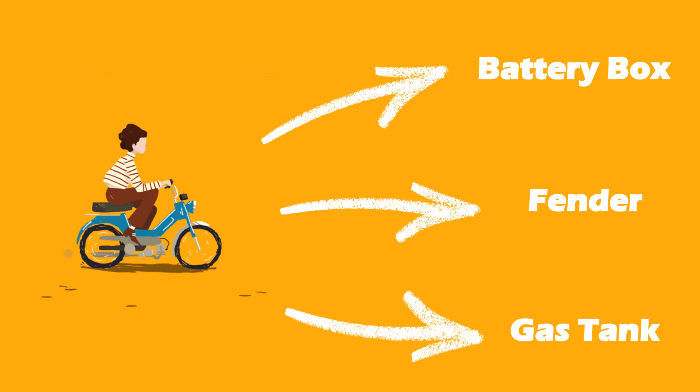The first part of the motorcycle that we are going to talk about is the fender. The principal purpose of the fender is to prevent sand, mud, rocks, liquids, and other road spray from being thrown into the wheel. This part of the motorcycle is made from aluminum because it needs to be light, strong, flexible, malleable, a good conductor of heat, and have high corrosion resistance. All of these qualities are required for the elaboration of the part.

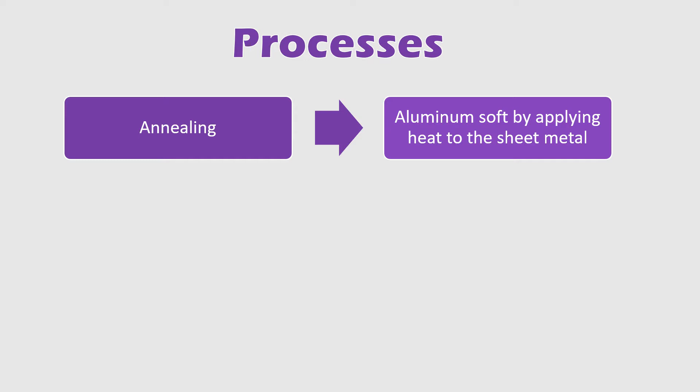In order to make this part, it's necessary to use the following processes: annealing. This process makes the aluminum soft by applying heat to the sheet metal, so it's easier to manipulate. Shrinking process. This is to give the aluminum the shape that is needed. First, it's necessary to shrink the outside edge to create the curve. You can also achieve the same results using a stump or a leather bag.

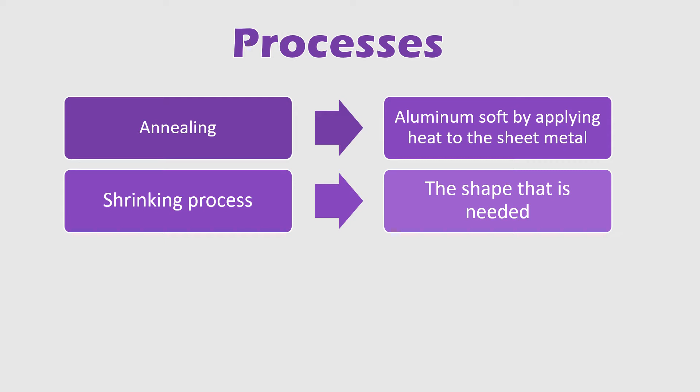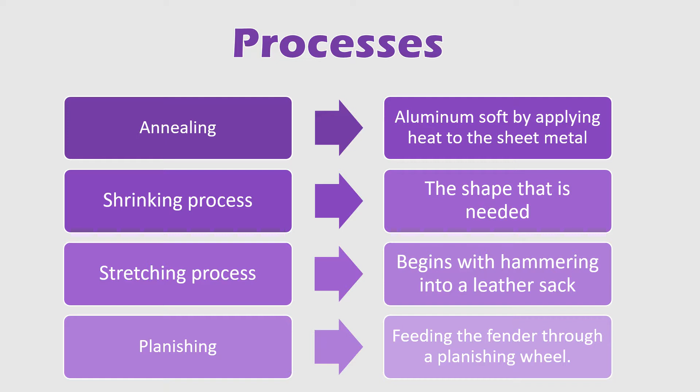Stretching process. The stretching process begins with hammering into a leather sack using a blocking hammer. In order to create a nice arc, it is necessary to hammer in the center of the piece. The metal stretches on the inside while shrinking on the outside. Planishing. This is to take out the highs and lows left from the shrinking and stretching processes by feeding the fender through a planishing wheel.

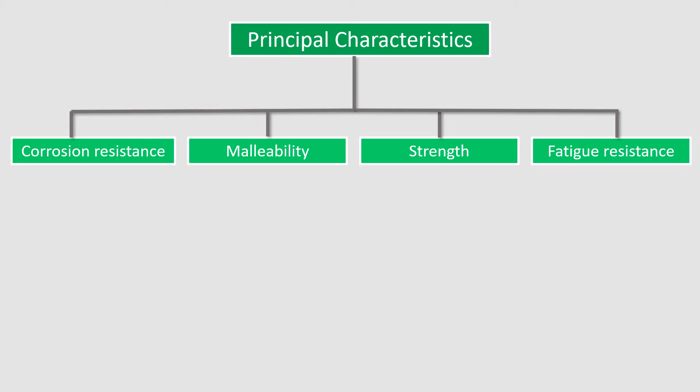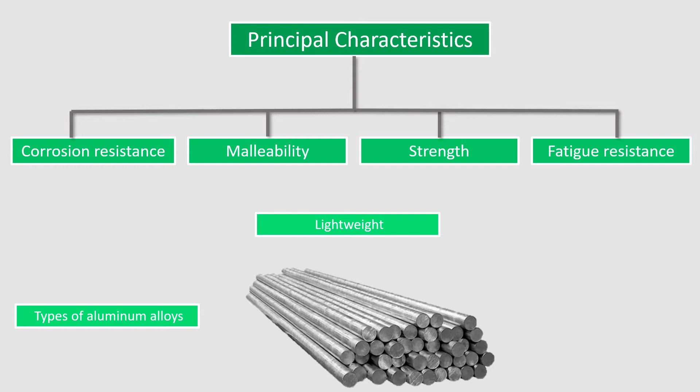When purchasing the aluminum, we need to take into consideration some principal characteristics like corrosion resistance, malleability, strength, and fatigue resistance. It is well known that aluminum is a lightweight material, but there are different types of aluminum alloys that are categorized depending on the alloy, and each one has different qualities for different applications. In the next two tables, you can see different types of aluminum alloys and their respective characteristics and applications.

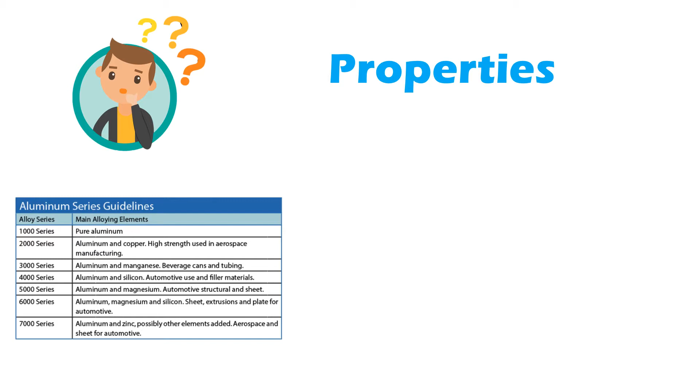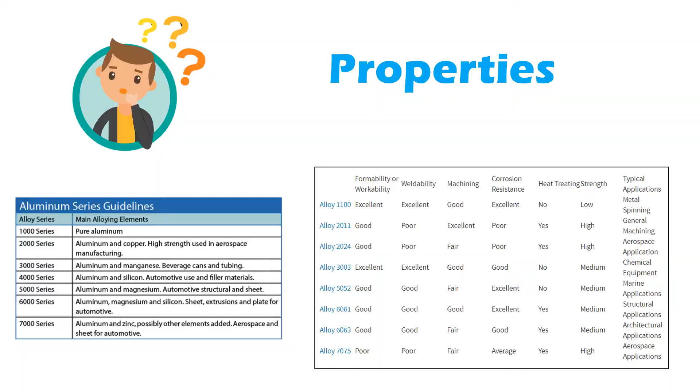For the elaboration of the fender, the best two options are the alloy 2024 or the alloy 6061. The cost of the alloy 2024 ranges from $3.88 to $4.95 per kilogram. For the alloy 6061, the cost ranges from $3.19 to $4.15 per kilogram. Each alloy reacts differently to certain welding processes. The most common ones used in the automotive industry for aluminum are resistance spot welding and arc welding. In the next table, you can see some benefits of each one and some drawbacks.

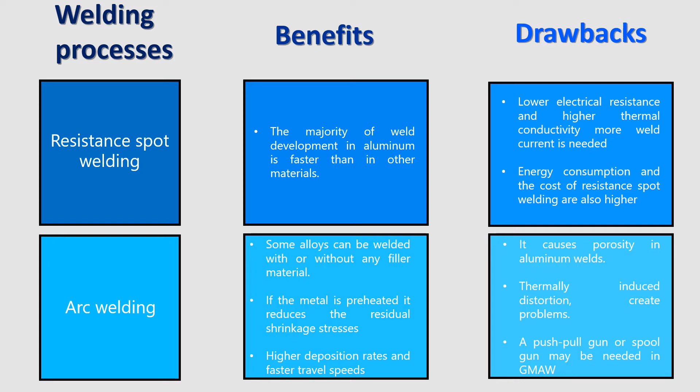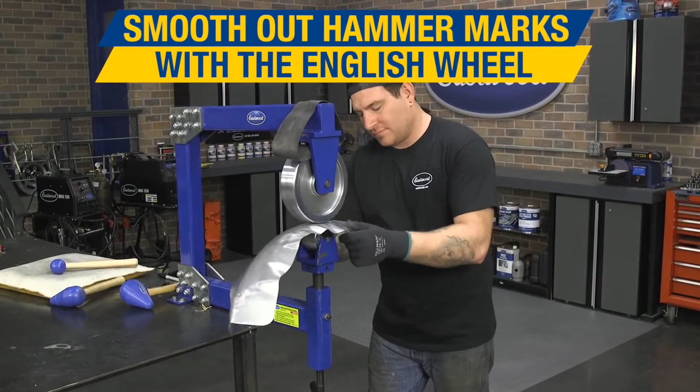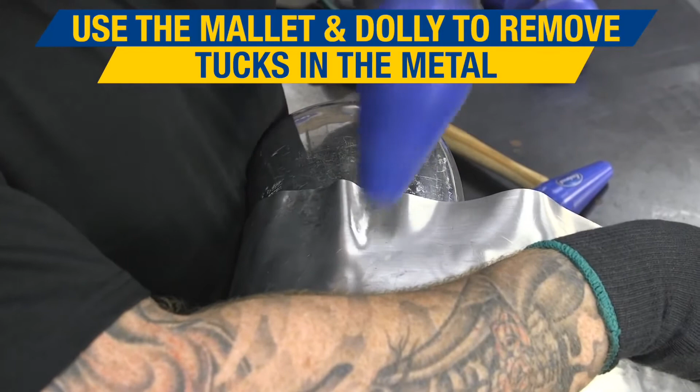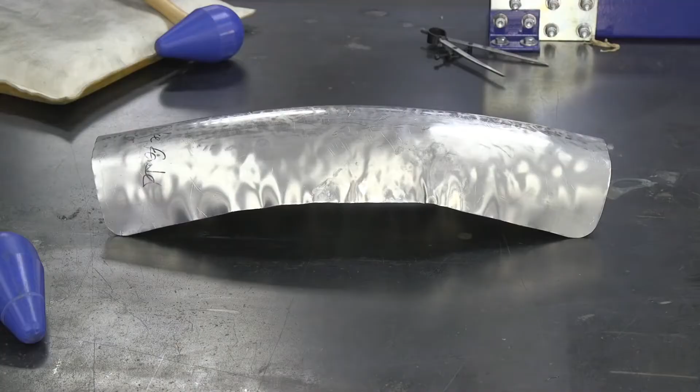It is possible to apply some heat treatment processes to the alloy 2024 and alloy 6061 to achieve some mechanical properties. In the case of the alloy 2024, the best option is to use T6 heat treatment, a two-phase process that can increase the strength of the alloy by as much as 30%. First, it is necessary to heat the metal at 494 degrees Celsius and quench the metal in water, followed by reducing the heat to 191 degrees Celsius for 10 hours.

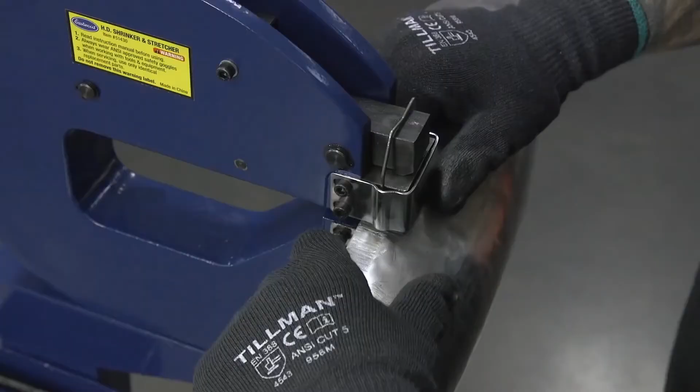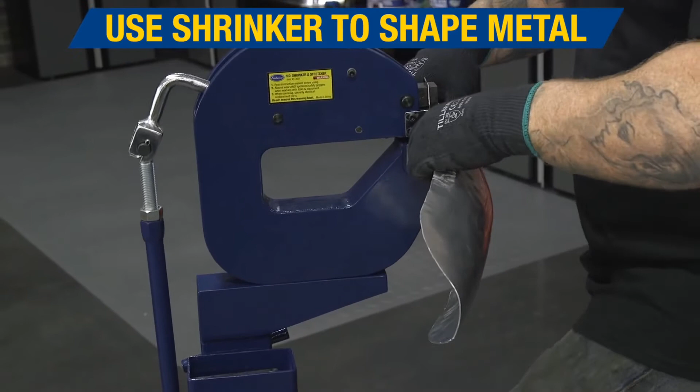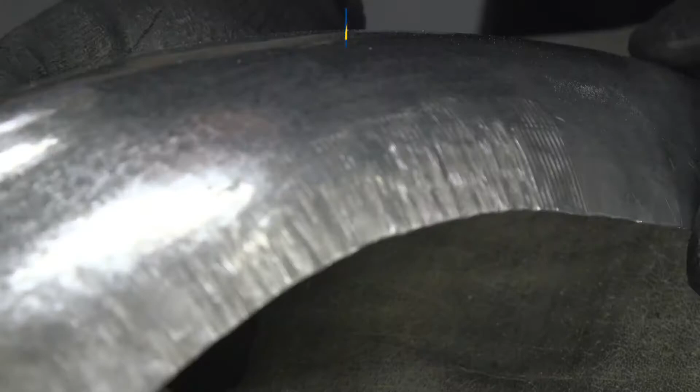For the alloy 6061, we can use T4 heat treatment to accomplish the strengthening. This is also known as natural aging. The T4 condition is obtained at 494 degrees Celsius, followed by a cold water quench, and later letting the metal sit at room temperature to obtain the properties of natural aging.

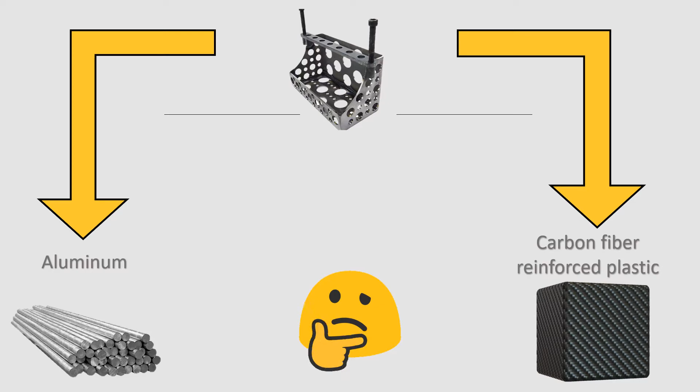The next chosen part is the battery box. An ideal structure for a battery box consists of aluminum for its high thermal conductivity and carbon fiber reinforced plastic for its light weight and high strength. We can produce a CFRP structure and embed aluminum at areas where high thermal conductivity is required, specifically areas in contact with the battery or batteries. This ensures we have the right materials in the right place.

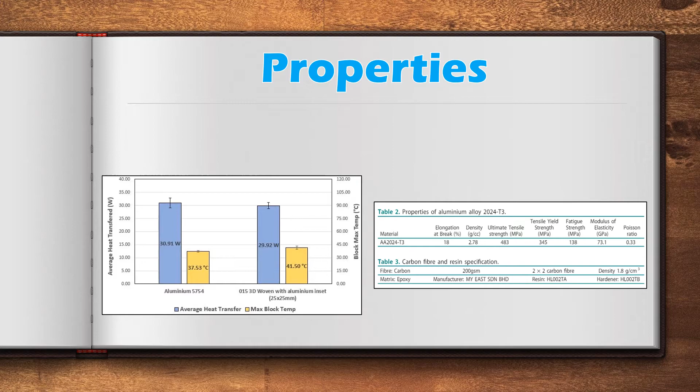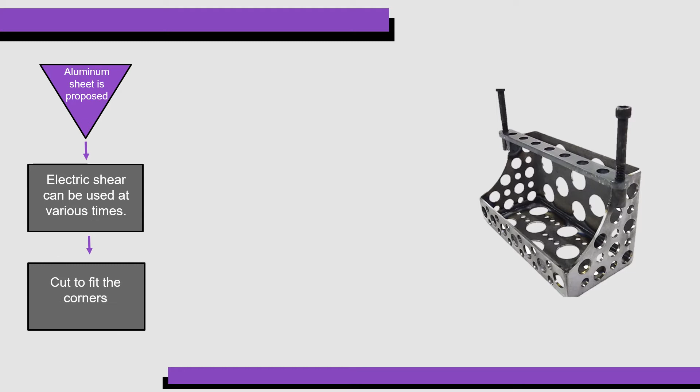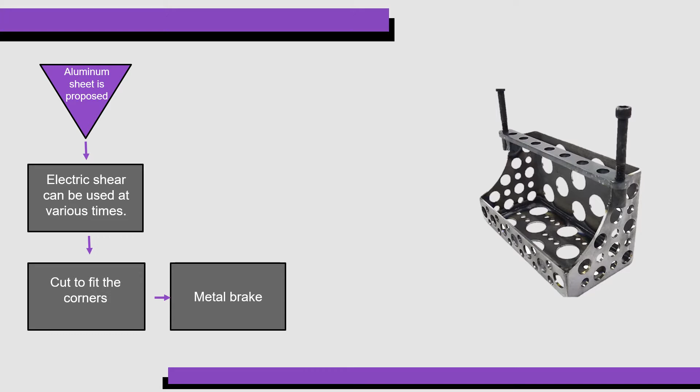For the creation of the battery box, some processes are required, since the use of an aluminum sheet is proposed and this needs to be adjusted, so an electric shear can be used at various times. Initially, to get the exact measurement of the box, the pieces need to be cut to fit the corners. In the same way, it is important to mention that the use of a metal brake is necessary, since it is necessary to bend the pieces and form the box.

In the same way, the creation of the tabs is needed, and it is important to mention that a punching process is needed to create some holes. In addition, we can have different features to have a good quality material. Refer to a structural aluminum.

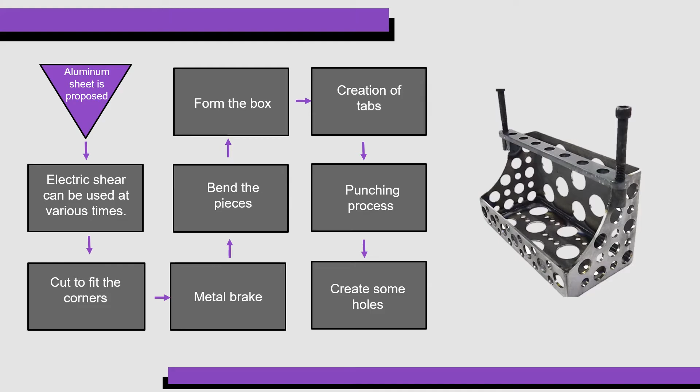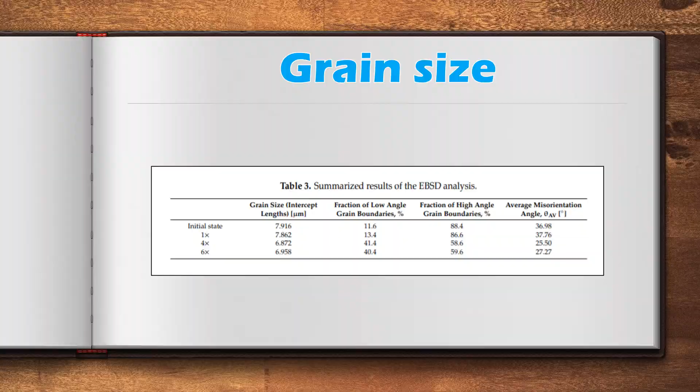And it is important to be careful with the state of the surface for this component, because it saves the motorcycle battery. So cracks should be avoided and corrosion should be avoided in the same way. And in the case of the edge condition, we need to adjust the borders with the above mentioned methods in order to create a proper box to fit the battery.

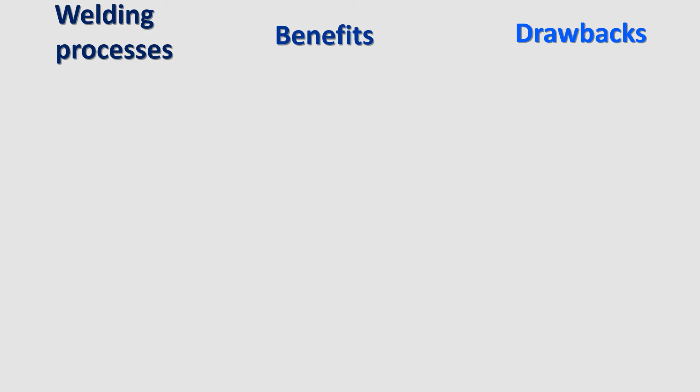To create the box properly, there is the option to weld the sides, and there are several methods involved. Gas tungsten arc welding is one of the most popular options, which requires a constant current equipment with alternating current capabilities using 100% argon as a shielding gas. This process is also very clean, as the AC cleans the oxidized layer of the aluminum as it welds. And we have more details in the table.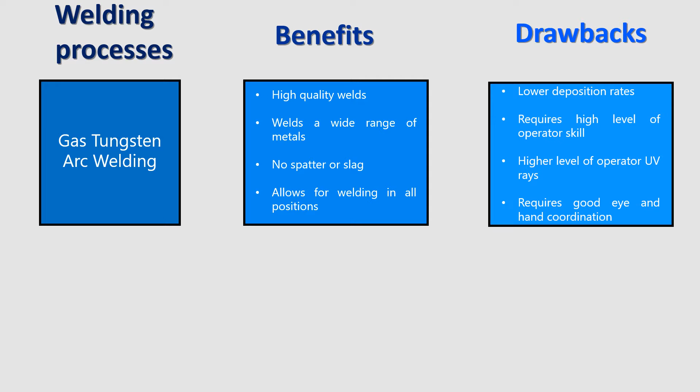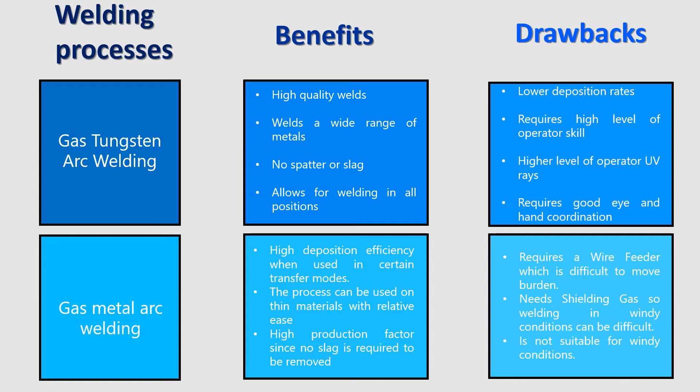Well, and we have the gas metal arc welding. That is another common method used for aluminum welding. This type of welding typically has faster travel speeds and higher deposition rates than TIG welding, affecting the weld quality. However, it does utilize a mechanical wire feeding system, which means the welder may have the use of a spool gun or push-pull gun to make wire feeding possible. Also, we have more characteristics in the table.

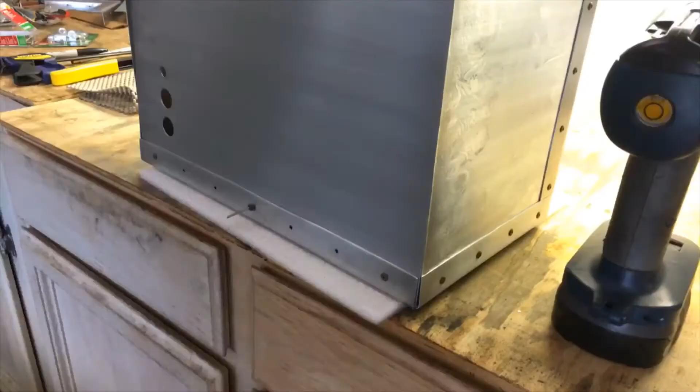And finally, it is important to mention that heat treatment processes for aluminum are precision processes. They must be carried out in furnaces properly designed and built to provide the thermal conditions required. The general types of heat treatments applied to aluminum and its alloys are described in the video.

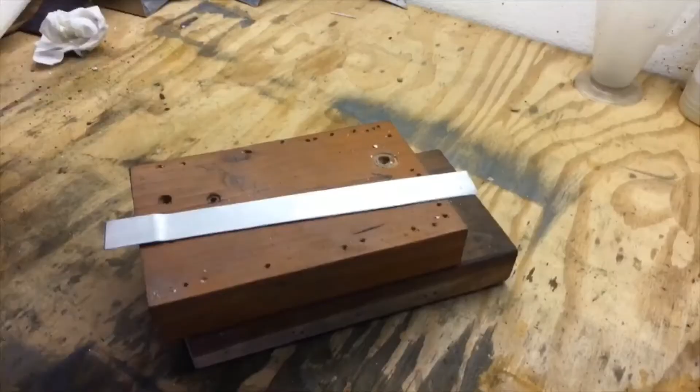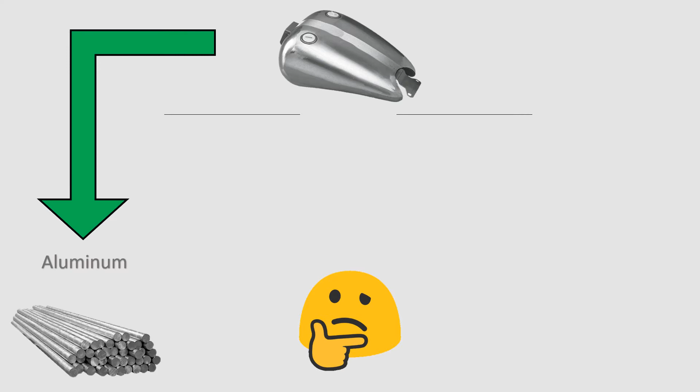The last part is the gas tank. The gas tank of every vehicle is subject to the highest safety regulations. Strict statutory standards apply to both the gas tank and the materials from which it is made, requiring all components to pass extensive testing and inspection scenarios prior to serial tank production. There are primarily two types of gas tanks for motorcycles. One, fabricated from aluminum, and second, fabricated from steel.

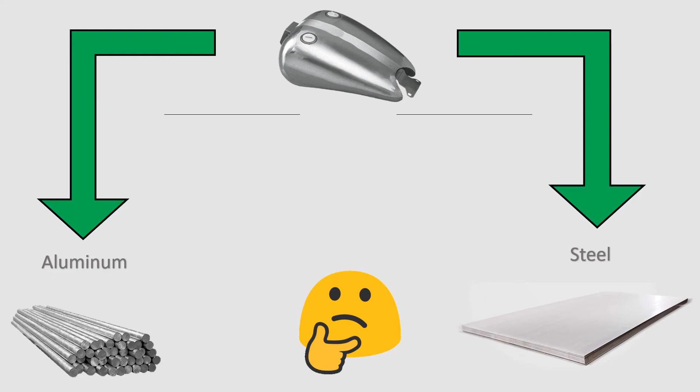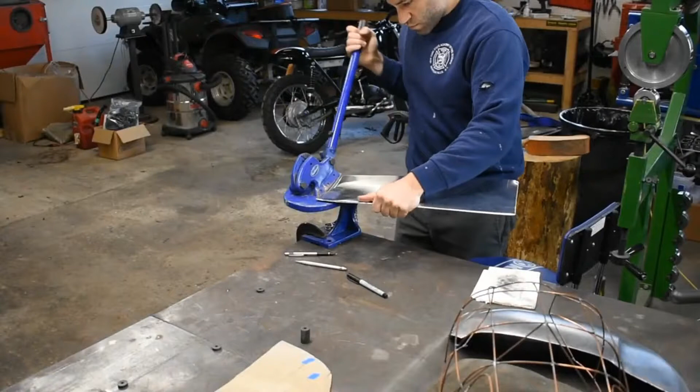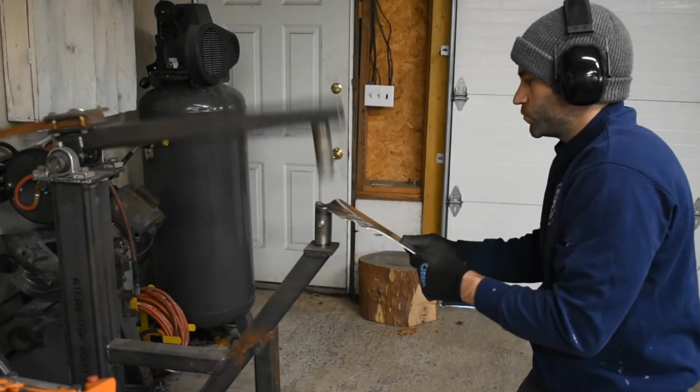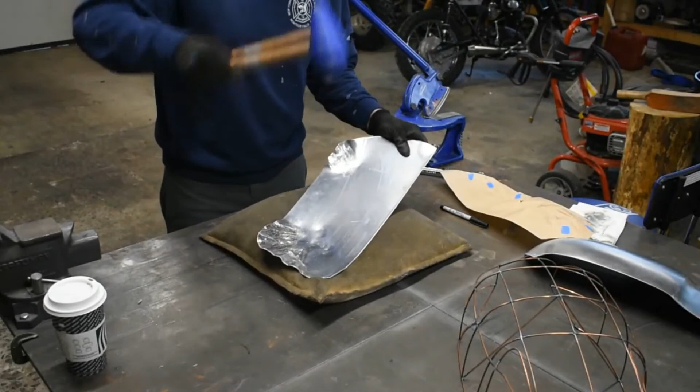Some of the characteristics of the sheet steel is that it needs to have a 16 to 18 gauge. This is relatively heavy steel, but it is preferred because of its strength. Even though gas tanks made of 16 gauge steel are heavier than gas tanks made out of either aluminum or 18 gauge steel, the strength factor, along with the attendant safety factor, more than overcome the weight disadvantage.

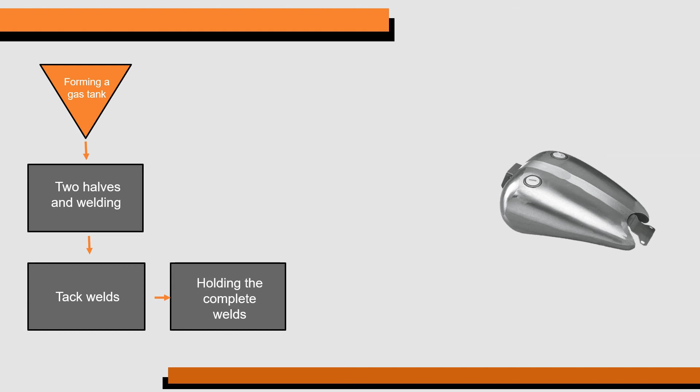A method of forming a gas tank includes forming two halves and welding the halves together. Two types of welds are used: tack welds for holding the complete welds after different steps have been taken to the tack weld elements or parts, and stitch welds to complete the welding of the two halves. Reinforcement is added where necessary. Double tanks for both gasoline and oil are also fabricated of essentially the same method steps.

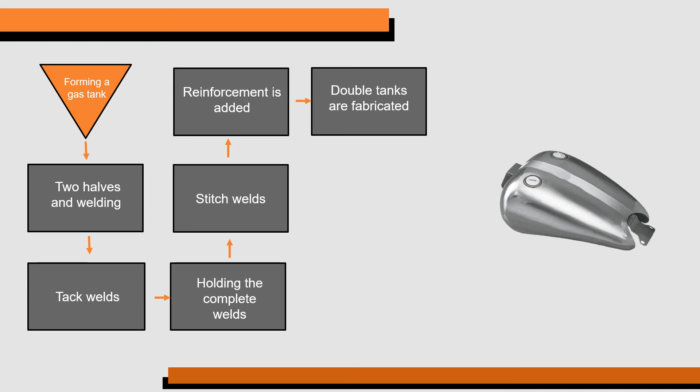All of the welds are then ground down as desired, and then the finished unit is pressure tested. If the pressure test is successful, the gas tank is considered finished and is then ready for shipment, painting, and installation on a motorcycle.

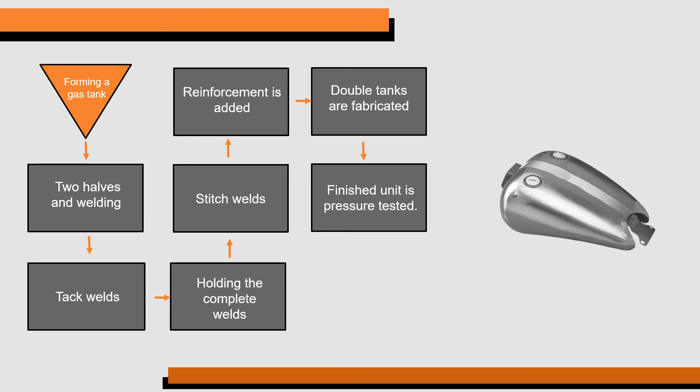Now, analyzing the different welding processes, when it comes to motorcycle welding, many in the motorcycle field may tell you that a TIG welder is better than a MIG welder. While a TIG welder does allow for more control, the MIG welder will give you a stronger weld that will be able to withstand the stress and strain.

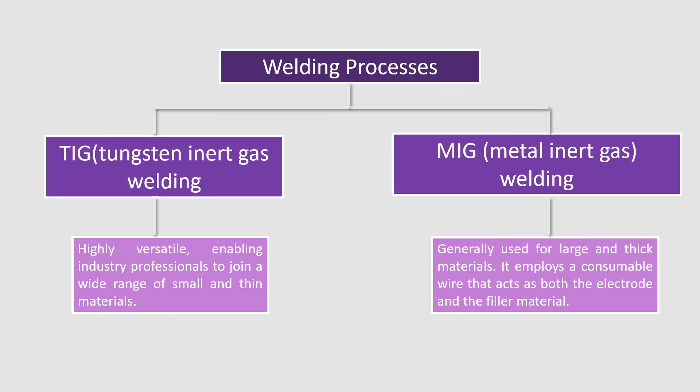The only worry you need to take into account when using the MIG welder is that the weld doesn't crack. Even though the weld is strong, it can be susceptible to welding slag. A reason why MIG welding is not generally used on the bike frame or gas tank of motorcycles.

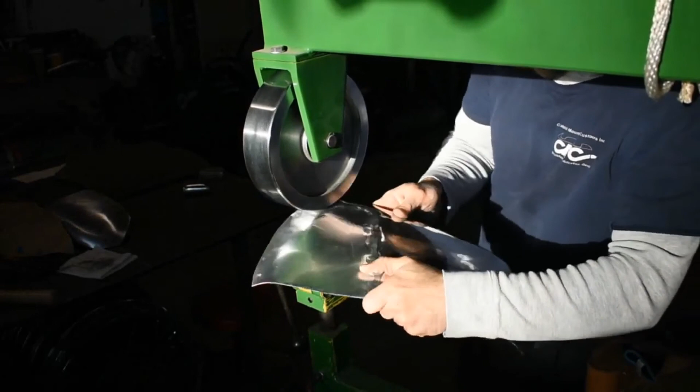It is important to mention that the heat treatment processes for aluminum and steel are precision processes. They must be carried out in furnaces properly designed and built so they can pass the test and they can provide the thermal conditions required to keep safe the user that buys the motorcycle.